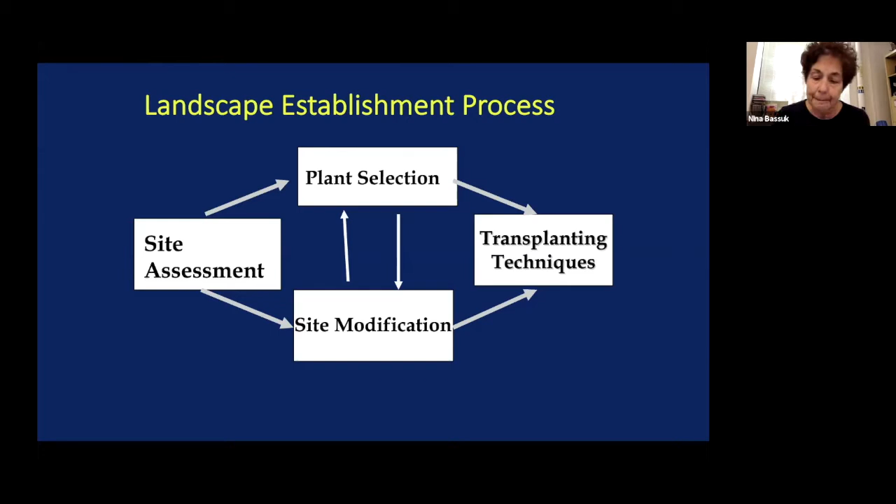And so when all the materials and the trailers were taken out and everything was back to normal, the tremendous soil disturbance that happened on that site does not go away. Even if you put a couple of inches of soil on top and put some grass, the soil disturbance is pretty impressive.

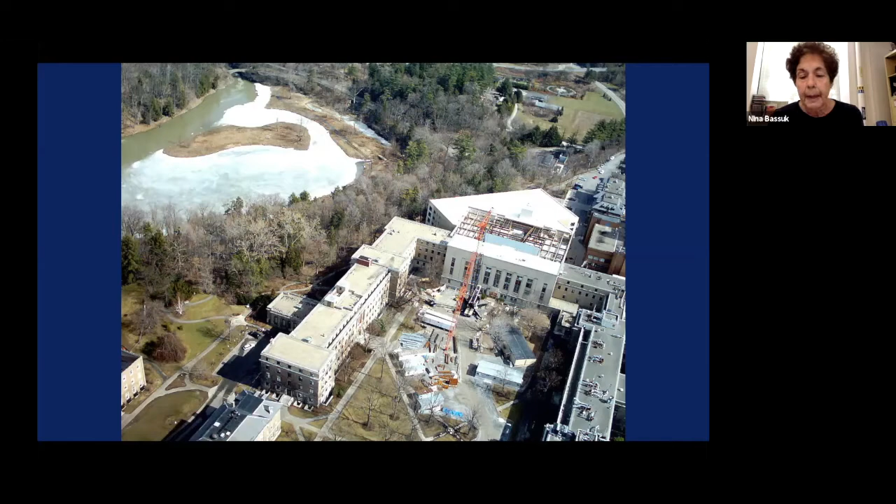So we said, okay, we did that. But we had to do many things to actually bring the soil back to health so that we could actually grow plants on it. It's growing very well now.

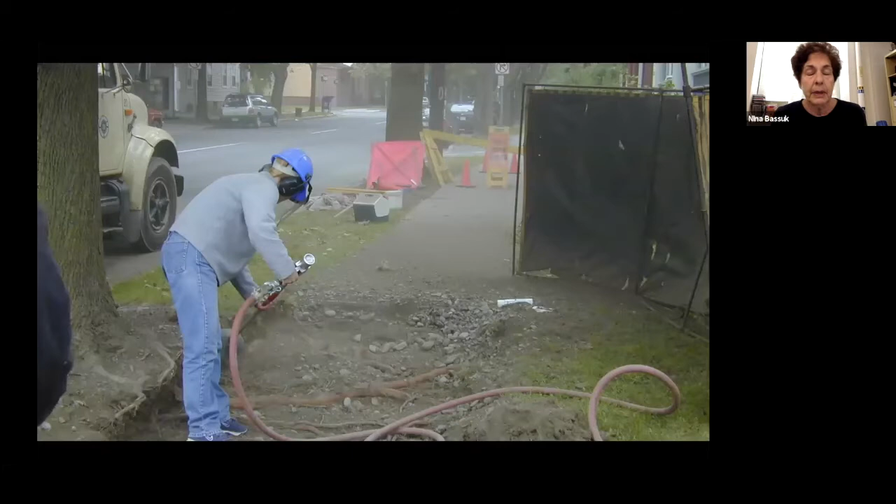Soil is a big issue of site assessment. We try to understand what's happening with the typical soil texture, structure, porosity, bulk density, but also we need to look at where the roots are in the urban environment. And so you can see one of the tools we use is called an air spade or an air excavation tool. And you can see these big Norway maples on the green strip between the curb and the sidewalk.

And there's no way the tree roots of that tree would have enough volume in that 6-foot wide green strip. So we wanted to find out where the roots are, and we do a lot of this work to understand where roots are growing in urban environments. In this case, we took off 4 inches of concrete, and we then tried to find where the roots are, because there's no way that there'd be enough soil volume in what you see on the surface.

So we actually did find that out, took the 4 inches of concrete off and found that the roots had actually found that area of weakness between the curb, between the sidewalk and the base course, and just made their way through that area into somebody's front yard, where they got a lot more of the soil volume that they needed. We see a lot of this very shallow rooting of trees in the urban environment because of the purposeful compaction we find in many cases.

So a lot of what we're going to be thinking about is, how do we find enough volume for trees? And also, how do you find the best trees to deal with this?

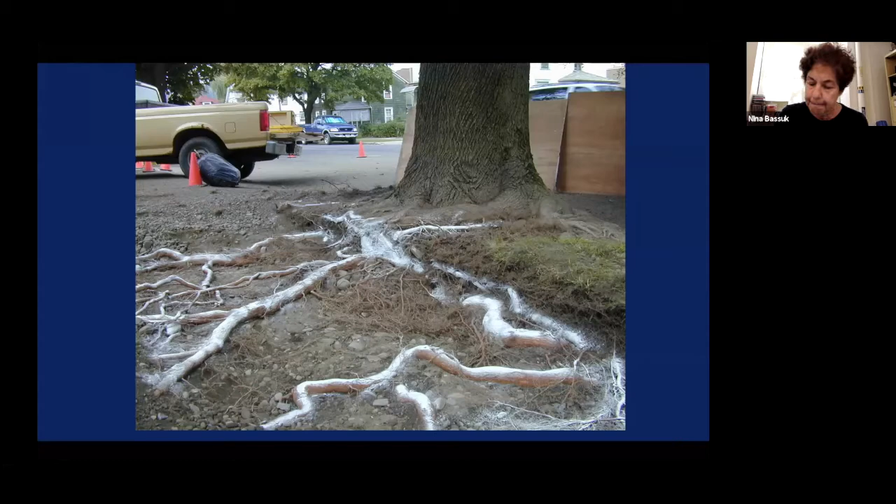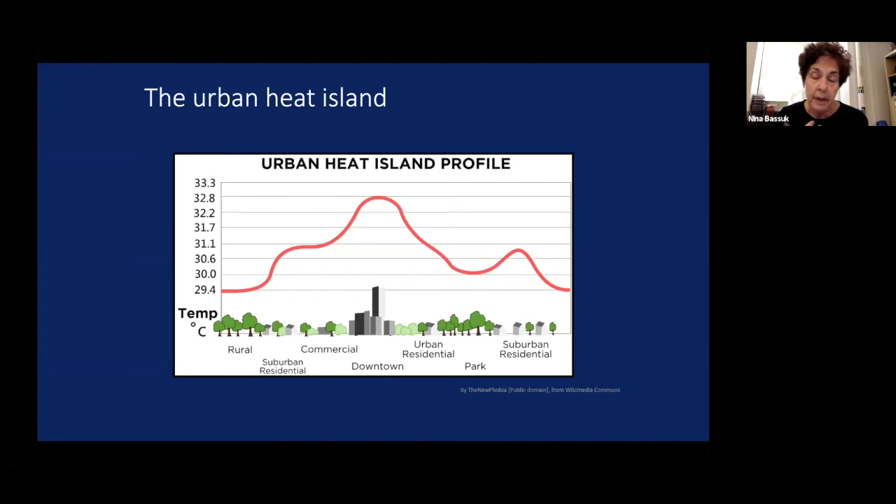Other issues that we deal with in the urban environment are the urban heat island. I don't know if you've seen our speaker last week, we talked about climate change and rising temperatures, but in terms of the urban environment, we've had increased temperatures now for as long as there's been urban conditions, especially pavement and reflective heat and asphalt and cars. And so in the interior of our cities, we get a much raised temperature, which also puts a lot of stress on trees in terms of water loss and water access.

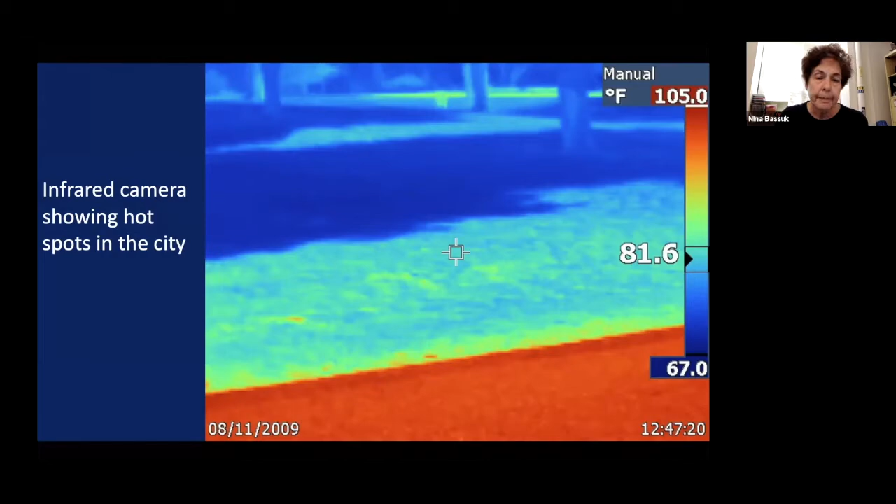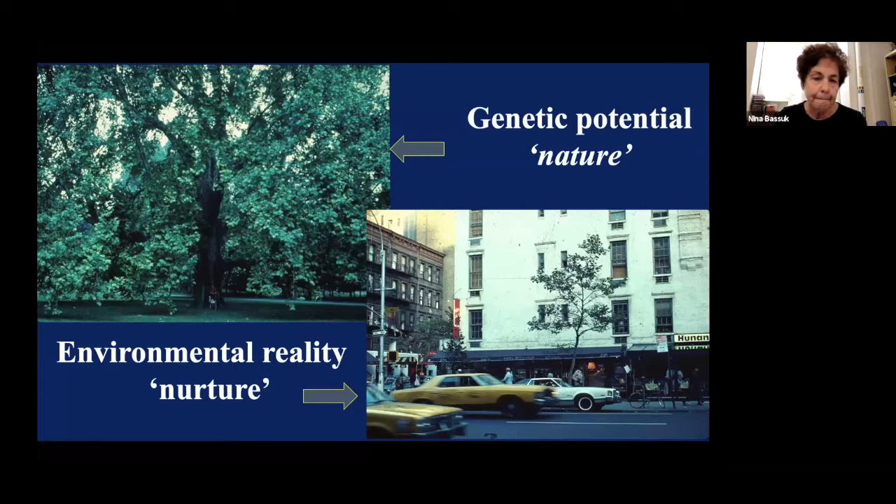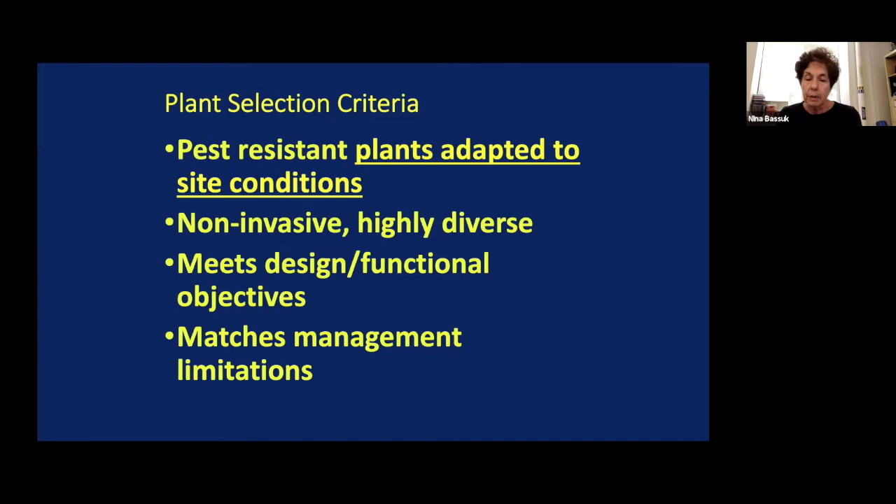So plant site selection criteria: pest-resistant, plants adapted to site conditions, non-invasive, highly diverse, meets the design functional objectives, and matches management limitations. Now, from our point of view, many of those things are procedural and basically planning kinds of things we can do. But when it comes to plants adapted to site conditions, that's what we do most of our work on in terms of the plant selection aspect.

So a lot of what we deal with is drought because of limited soil volumes, because of the hot nature of our urban environment. We have a lot of very high transpiration rates, low water availability, and even in a normal season, we would actually have water stress. So we started to look at plants that deal with water stress or limited water availability.

And there are basically two strategies that trees use. One is to avoid water deficits, and one is to tolerate water deficits. And avoidance may be increased water acquisition, deep rooting, increased hydraulic conductivity. And to reduce water use, you have stomatal closure, leaf abscission, reduced stem and root growth, or stem and leaf growth. So those are avoidance mechanisms, and they're valid, but in terms of the urban environment, we want to have leaves on the trees, and so leaf abscission is not a really good strategy for us.

In terms of tolerance, we're very interested in looking at tolerance, those trees that can tolerate stress by osmotic adjustment and having a very low turgor loss point. So these are things we're starting to look at, and we've done some work on this particular area.

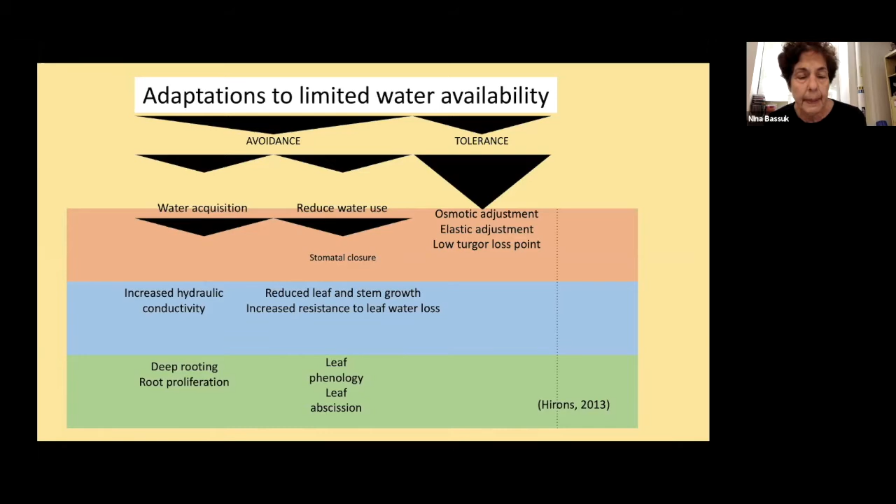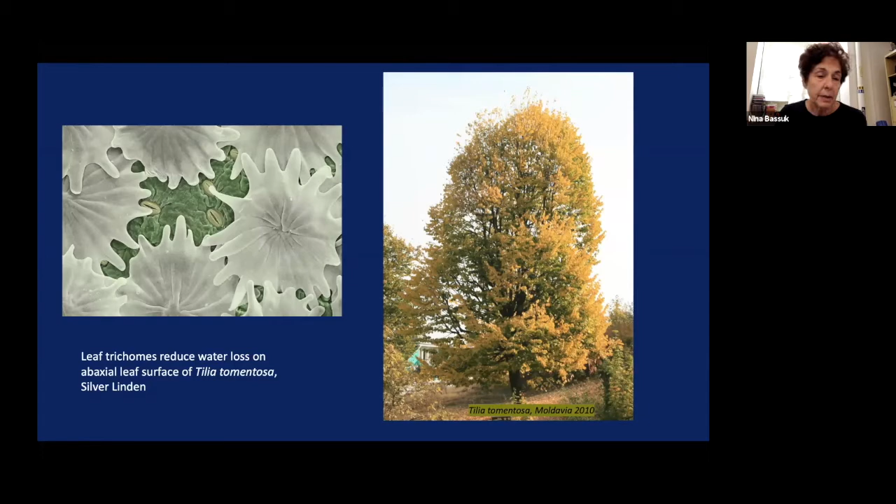So this idea of turgor loss point as a drought tolerance indicator is something we've been working on for many years. And it's kind of a universal measure. We can measure osmotic adjustment and calculate the turgor loss point, where trees actually can tolerate being in the droughty condition until they lose turgor and become damaged. And we can rank species in terms of their physiological drought tolerance this way.

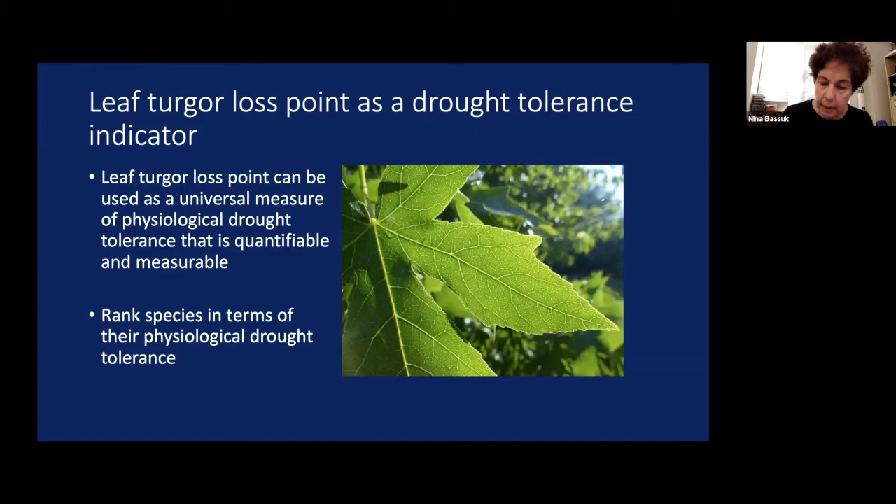So this is some work a couple of my colleagues and I did a few years ago, where we took 27 maple species and cultivars, and we rated them for their turgor loss point. And the more negative you get, the better it is in terms of trees being able to tolerate stress in their cells before they lose turgor. And you can see at the bottom, the dark bars are spring turgor loss point, and the lighter bars are the summer calculations.

And so you have at the top, let's say Acer spicatum, which has very, very high turgor loss point. And Acer spicatum is a tree you'll find in the gorges and the understory, not very drought tolerant at all. And if you go down to the bottom, you see Acer monspessulanum, which is a Mediterranean tree, and Acer grandidentatum, which is one from the arid western part of the US.

And these have quite good abilities to modify their osmotic adjustment and have more negative turgor loss points. So these would be more drought tolerant than the Acer spicatum, Acer mandshuricum on the top. And so we can rate these. It's also interesting to note, if you're looking at the species, different cultivars have different turgor loss points.

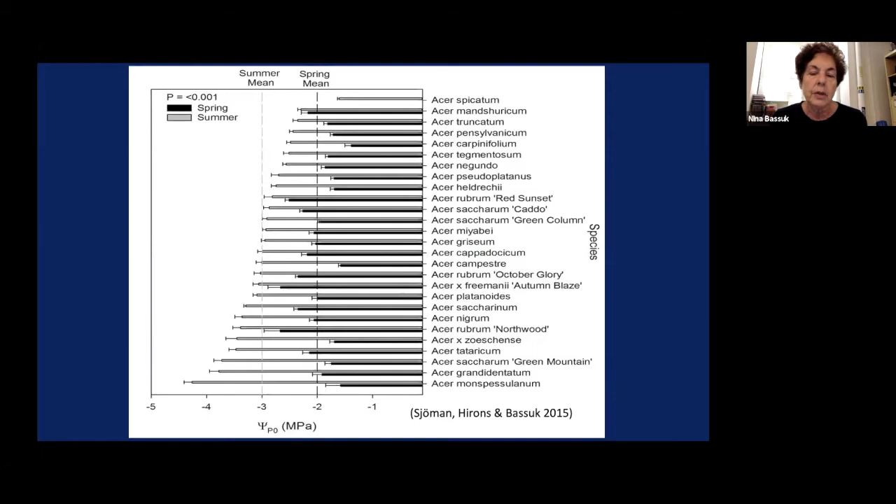So if you look at Acer saccharum toward the bottom, Green Mountain, which has pretty high turgor loss point, and then you go up to Acer saccharum Caddo or Green Column, their turgor loss point is much different. So we have species and cultivar differences that are very useful when we're choosing trees for the urban environment.

So with this information, we started to look at evaluating a long-term project. This is a white oak breeding project, which we started the breeding in 2004, 2006, and we had 7 maternal parents and 36 pollen parents. We had 350 unique hybrids, which we were trying to develop more drought tolerance, more alkaline soil tolerance, as well as good disease resistance and form and so on that you need for the urban environment.

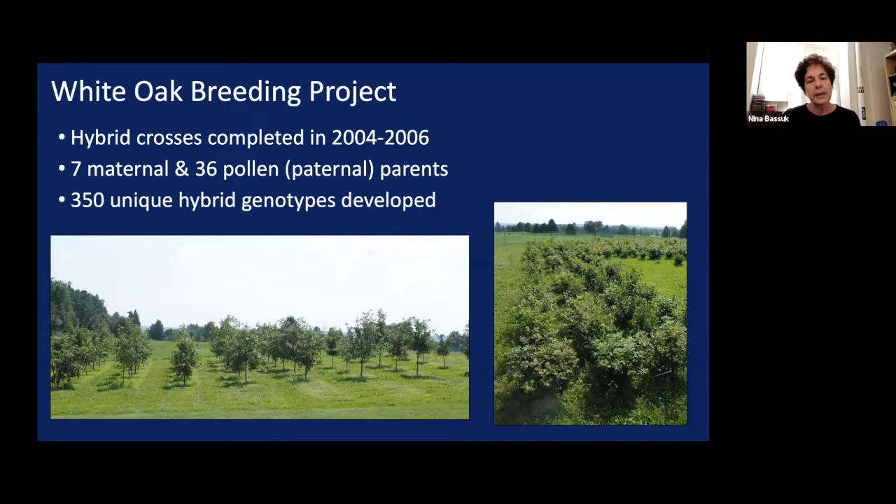We found some really unusual things here. We found true dwarfs. We found trees that had no central leader whatsoever, that grew laterally. And we had all kinds of different interesting things here, but we started to evaluate these for their ability to tolerate drought.

And so this is not those hybrids, but this is showing, I was interested not only in measuring the drought tolerance with the turgor loss point, but also, by giving trees sequential dry downs, could we increase their turgor loss point, basically asking them to step it up, given a little bit of drought. So on these pictures, you'll see on the left is Quercus bicolor, swamp white oak. On the very far left, those trees were well watered. And then the one slightly to the right, those had gone through cyclical drought dry downs.

And on the right side, you see Betula pendula, silver birch, on the far right that had been well watered. And the one toward the left of that had been going through cyclical dry downs. Now the birch is interesting. That's not considered a drought tolerant tree, and you can see why.

Basically, when you give it cyclical dry downs, it just loses its leaves. It says, I've had it, I'm not going to deal with this. I'm basically going to drop my leaves and wait for better times. On the left with Quercus bicolor, it showed no leaf drop. It basically kept on photosynthesizing during this time, even though the one just to the right of the one on the left had gone through many cyclical dry downs.

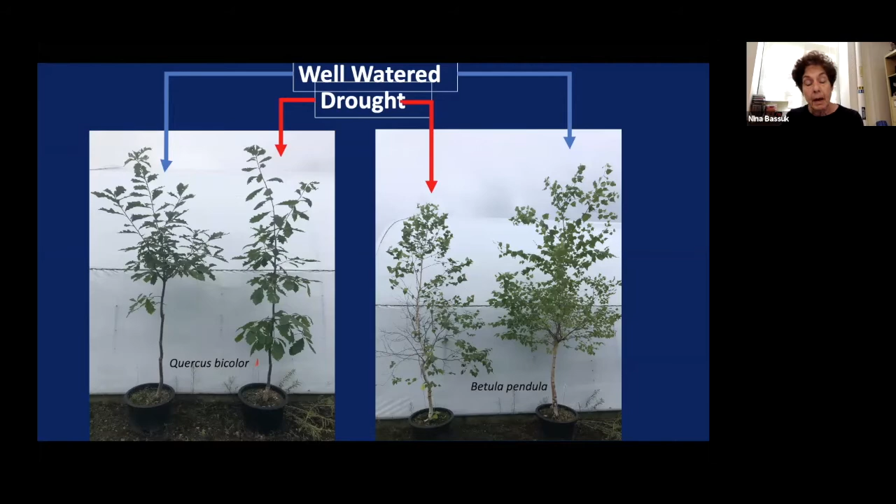So this tree, this white oak, Quercus bicolor swamp white oak, is an exceptionally drought tolerant tree, and it has the added advantage of also being tolerant of wet soils. So this is how we measure it. You can see on the bottom 3 columns, basically the x-axis is turgor loss point, and you have well watered on the y-axis and water deficit.

You can see that the bottom one, which was well watered, the 3 bars, spring, midsummer, and late summer, again, you'd expect in late summer you'd have more osmotic adjustment. But the one that had gone through cyclical dry downs showed that in late summer it had really changed and actually become more drought tolerant because it had experienced those cyclical dry downs and was able to step it up. It had a lower turgor loss point.

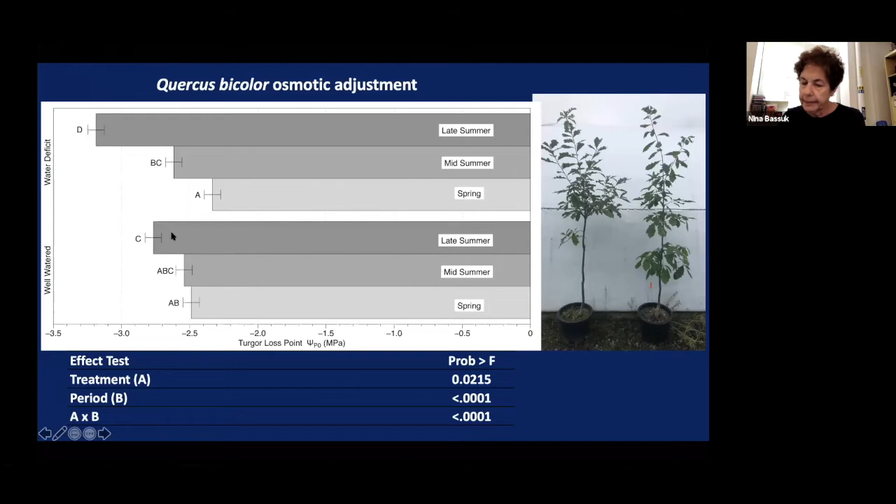So this is kind of interesting to see if we can actually modify the way trees grow so that they are able to tolerate a greater stress. So after we've been looking at these, we were evaluating many of these trees, and also we're looking at the same issues with Brandon Miller's Carya experiment. We were very interested in hickories, and we're doing some of that work with his trees as well.

We then had to figure out, well, how are we going to propagate these trees? Because these are all clones, they're all unique genotypes, and so we spent a lot of years early before we started breeding to figure out how we could clonally propagate them. And this is just a quick view of basically we cut trees down to maybe 4 or 5 inches to get to the juvenile part of the plant.

We cover over the plants so they're etiolated as they grow out. And we treat the bases of the plant with IBA, shade them so they don't crisp up in the sun. And then we take the shade off, and we add soil that's mixed to the cone surrounding those trees, and then we get, hopefully, rooted plants. And so there you can see the whole process. And here we have clonally propagated oaks at the end.

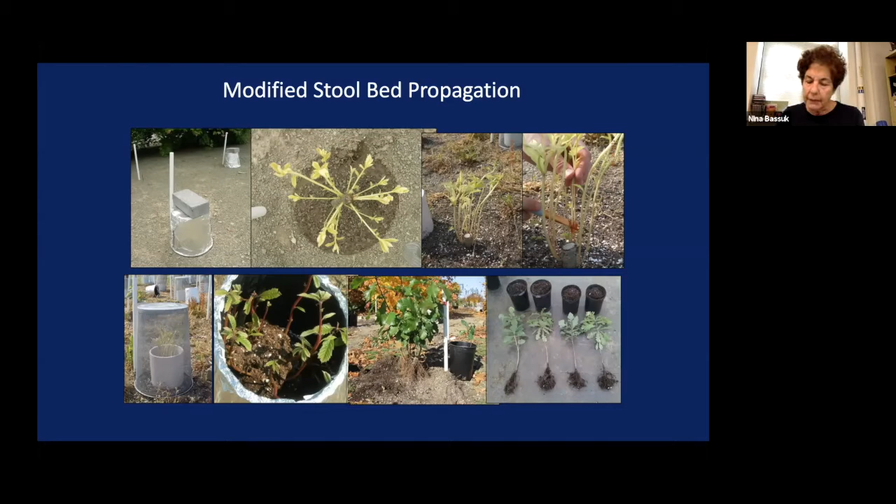And this was great. We're very happy. We published all about this. But in 1 year, we might get 4 plants, which is not very good if we're going to try to introduce this to the nursery. So we went a different route. Tissue culture. Now, if anybody's familiar with micropropagation, oaks have never been really successfully propagated through tissue culture.

And we have been working on this now for many years, and we've had some success. It's all genotype specific. So what works for one doesn't necessarily work for the other, but we have our certain trees. And here's the one tree we hope to introduce first, which is fondly called 1819. This is a three-way cross of different white oaks. And we are starting to get this to multiply and to root in tissue culture. So we have hopes that we'll be introducing some of our hybrids that have particularly good characteristics in the next few years.

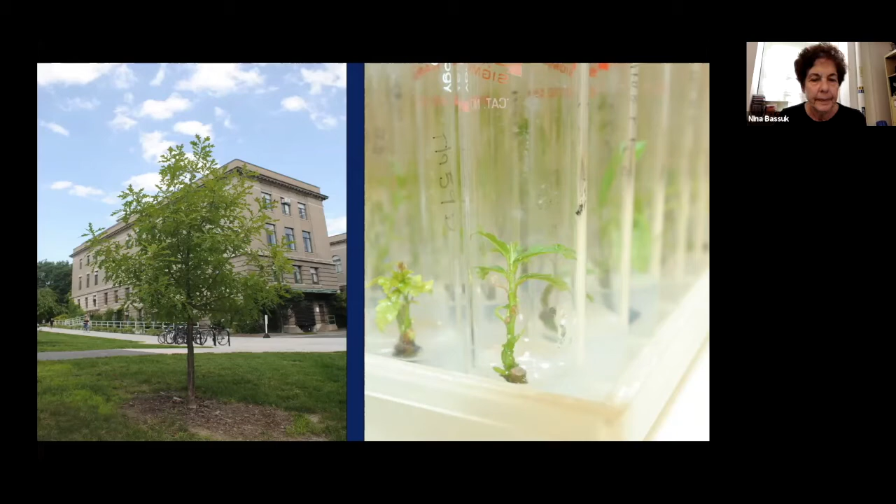So we had our first group of plants. They got so big we had to get them out of the ground. So we gave them to about 100 different communities in New York State, and each community got at least 5 trees, and they are very happy and the trees are growing well.

And we're taking data on this in a long-term study to see how these trees are doing in different soils and different climates. We have trees in Lowville in Zone 3 down to Long Island in the tropics. So we have trees all over New York State of these hybrids that are being tested on a more observational long-term basis.

So I'm going to change gears here just to talk about, we can look at plant selection, which is very important, and we can get better plants, more drought-tolerant plants, and so on. But everything really resides with the soil. You can have the best plant in the world, but with poor soil conditions, they really will not tolerate that condition very well, and they won't grow as well.

So we had to deal with soil and soil disturbance in the urban environment. So this is just going to talk about our work with structural soil over the past 20 years. We developed structural soil because of the required compaction prior to laying pavement. Pavement is ubiquitous in the urban environment, parking lots, sidewalks, roads.

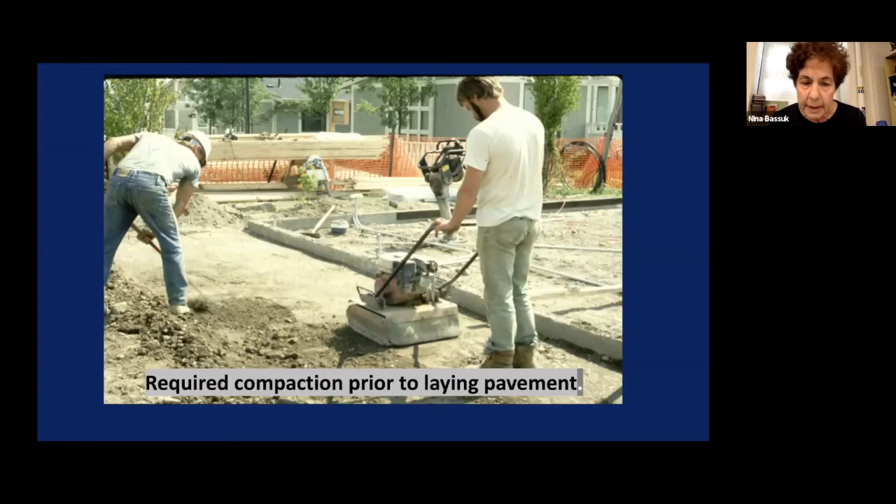And in order to lay any pavement, you have to purposely compact the soil so you have a load-bearing surface to be able to lay the pavement. If it's too soft, the pavement will subside, it will crack. So you need load bearing. And I worked with engineers to figure out what they needed for this. And we learned to speak engineering during this process.

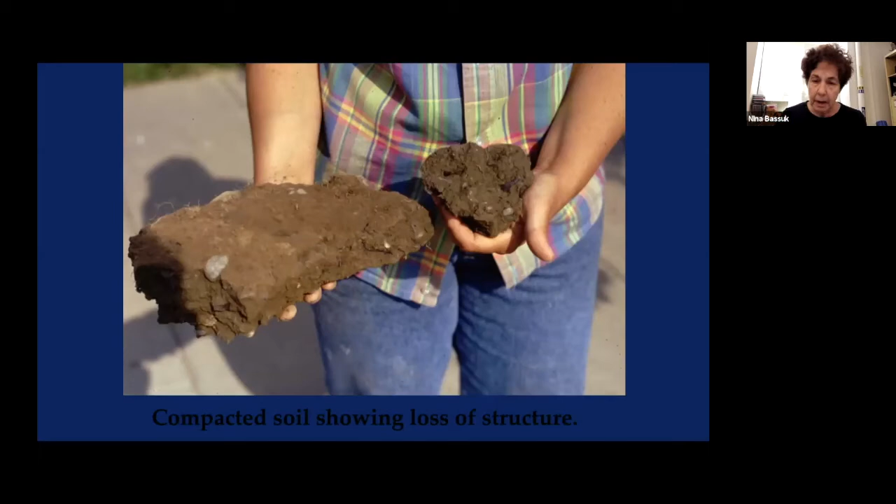And so the soil under that area was not treated any differently than the soil where the pavement is going to go. So yes, you can dig it out and you can put a tree there. And then the problem is, where do the tree roots go? They really have no place to go because of the compaction level of that sidewalk base. And so we often say we lower the tree into the coffin here,

which is unfortunate. Here's a 4x5 tree pit in New York City. Tree is going in, you're going to put some soil around it, and then the tree will grow or not grow. And typically it doesn't grow very well.

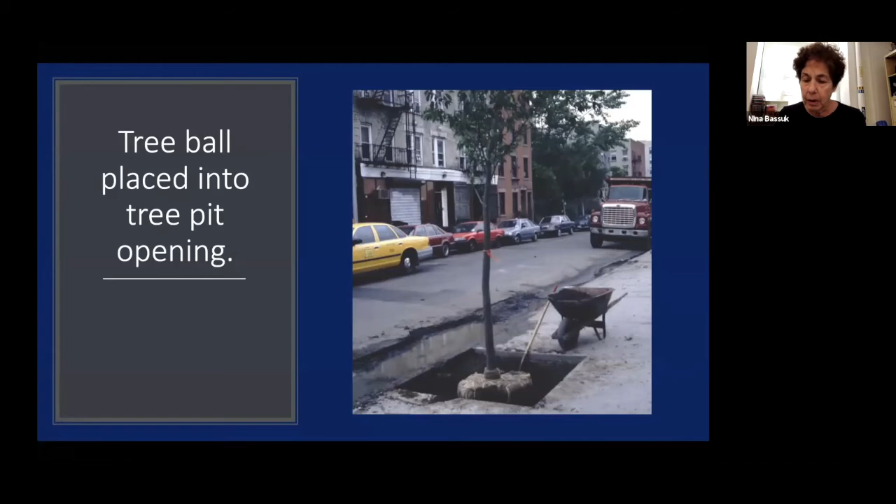And if you get one size gravel and you basically compact it, you'll have very large pores or voids in between. And so in the voids, we would put soil, and if we have stones touching stones, the soil in the pores or the voids is not compacted because the stone is bearing the load from on top. You can think about it as a rigid lattice or a matrix, so that the stone provides this matrix, and then the soil is in the pores, and the soil is not compacted because it does not feel the compactive load on top.

In this part of New York State, we use limestone as our base, typical cheap stone, and this is the size stone we would use for structural soil. And then we would add soil. It's about 80% stone, 20% heavy clay, loam, or at least 20% clay by weight. And this is how it's mixed. There's a couple of other features in that, but this has been used now many places.

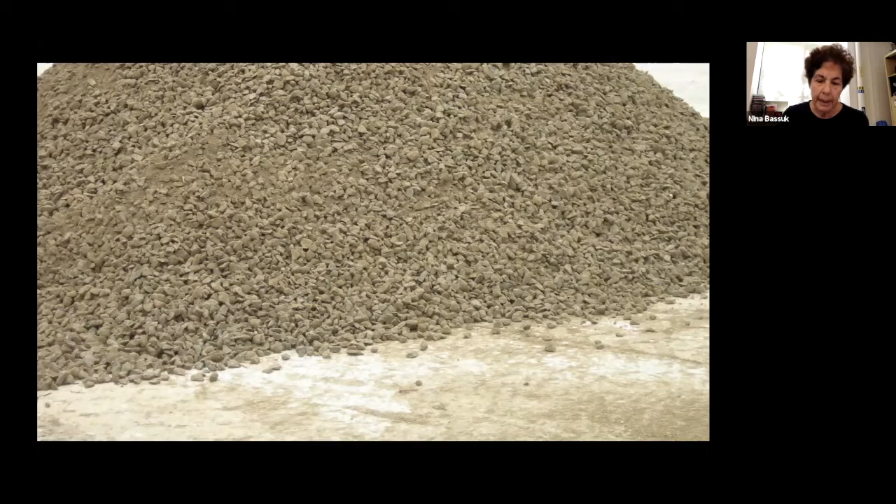When we were basically exploring this, we needed to have some sidewalks to nowhere where we could put this in, because cities don't like you digging up all their sidewalks. So we actually developed these sidewalks to nowhere. We had structural soil and just compacted base with not structural soil, and we had a clonal tree planted on top of them so we could look at what's going on with the roots. And then we take them apart, and that was about 4 or 5 years later.

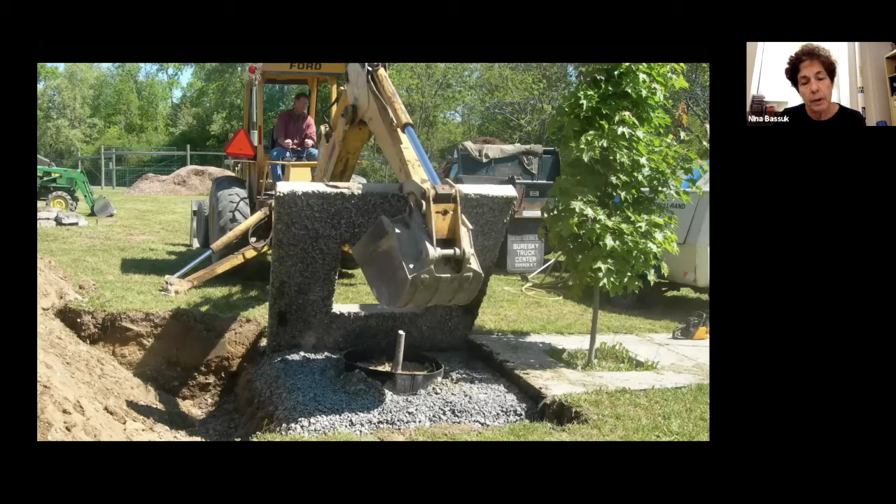We take the sidewalk off. You see a little base course of gravel. Tree was cut down. And then we wanted to look at where the root growth was. So this is using that air spade again, the air excavation tool. And we could take the roots out in one piece by using the air spade. And that's a root system of a tree growing in structural soil, CU structural soil now.

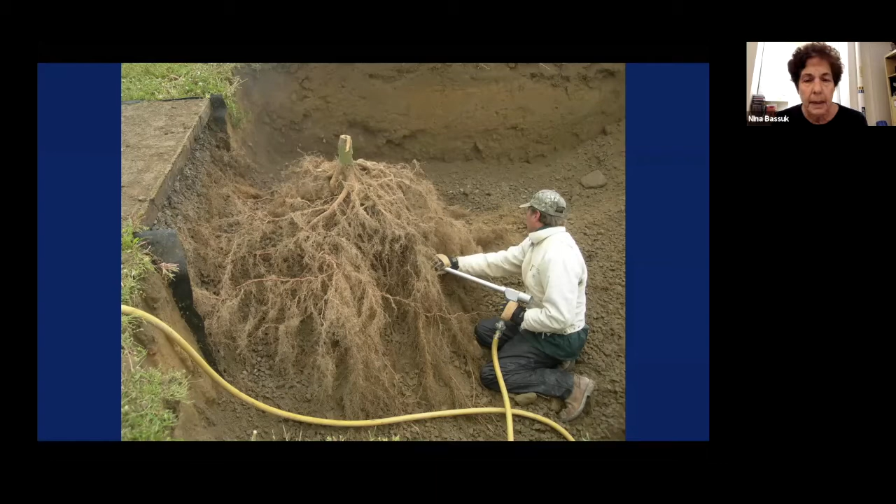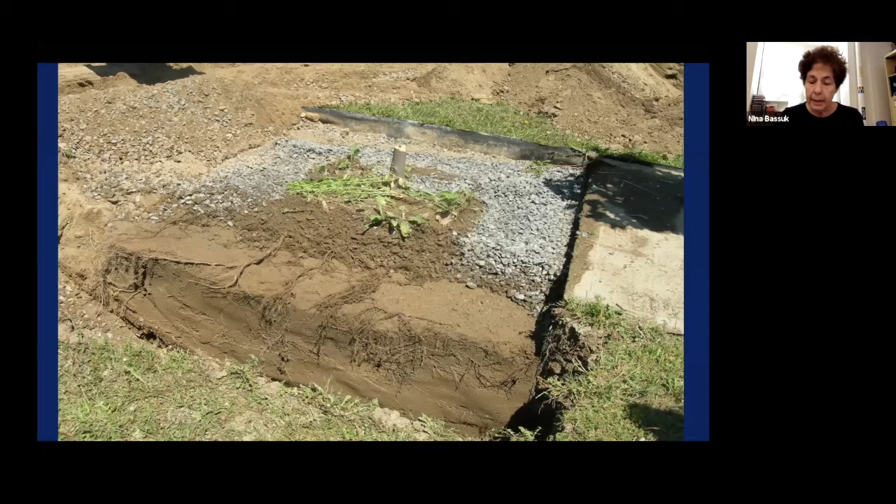And we'd made these trenches down a meter deep, and so we could see just how extensive those roots were. And the control was here, our typical compacted soil with a little bit of base on top. And we excavated that as well. And that's what we found, which we find all over the place, these pancake-like roots with very shallow root systems. That one on the right just found its way down the edge of the trench, otherwise it would not have been so deep. But pancake roots, very shallow, very susceptible to drought, is what we typically find.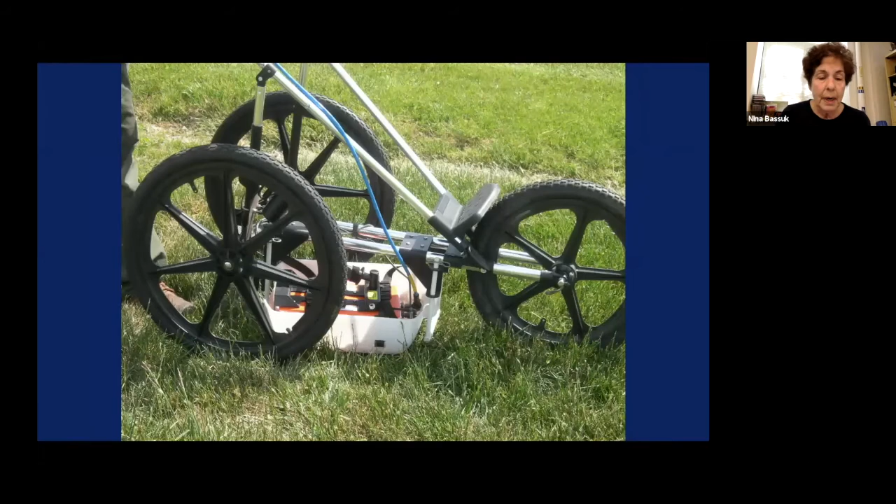So we wanted to study roots under pavement, and this was a difficult thing. You'd have to go through what we did, taking the sidewalk off, air excavation. So is there an easier way to do this? So we started working with Gary Raffel, who's an arborist who owns a ground penetrating radar apparatus, which you're looking at here. It's like a souped up tricycle with a radar unit at the bottom.

And we wanted to look at, well, here basically, there's been some new work with radar looking at how radar could not just look at stones and pot shards and metal, but it could actually locate roots. And we were very interested in this. And so you basically run the machine over the ground, and the radar will reflect a beam from roots. Roots are typically tubes of water. So this is the work that was done, was very interesting to us.

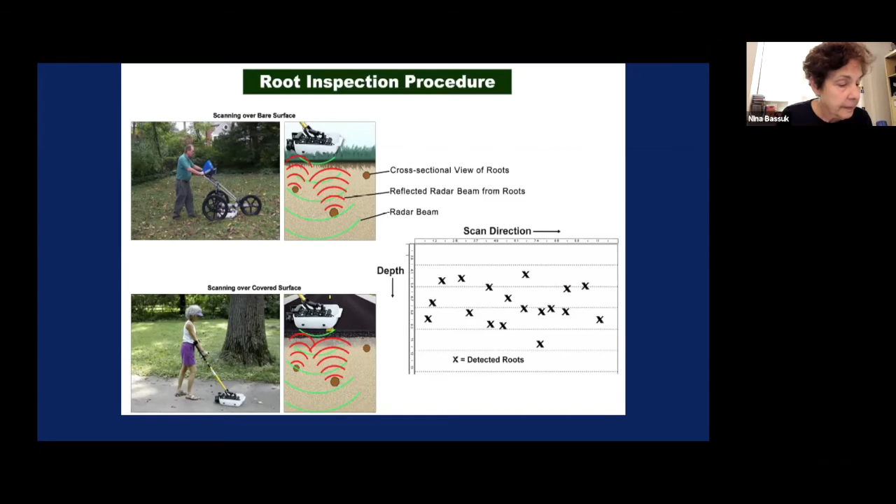So we could do this remotely, not having to dig up everything to see where the roots were. You can do it over pavement, you can do it over soil, and you get a virtual trench. On the right side of the slide, you see if you're walking along and you have depth, every one of those X's is a root detection. So we were very interested, started working with this, but before we got to the point where we could say, yes, this works, we're really locating roots, we had to do a ground truth study to see just where the roots were. Was it really accurate?

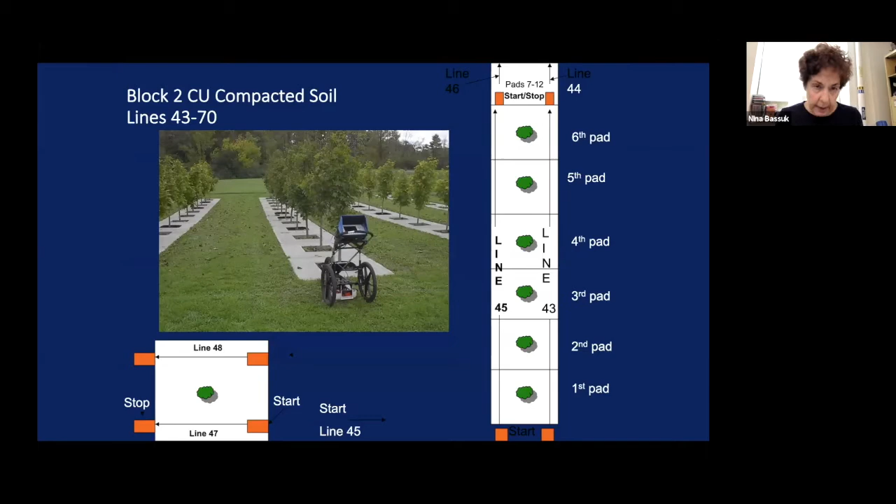So we took our sidewalks to nowhere, and we had our machine, and we did scans down on top of the sidewalk to look where the roots were. And of course, these were trenches. They were lined with heavy mil plastic, so the roots did not go out beyond the sidewalk area. And then we actually dug up some and had our own manual count, visual count of roots that were in that sidewalk area. We could only detect roots just under a centimeter diameter. We couldn't get the fine roots, but we did do those counts.

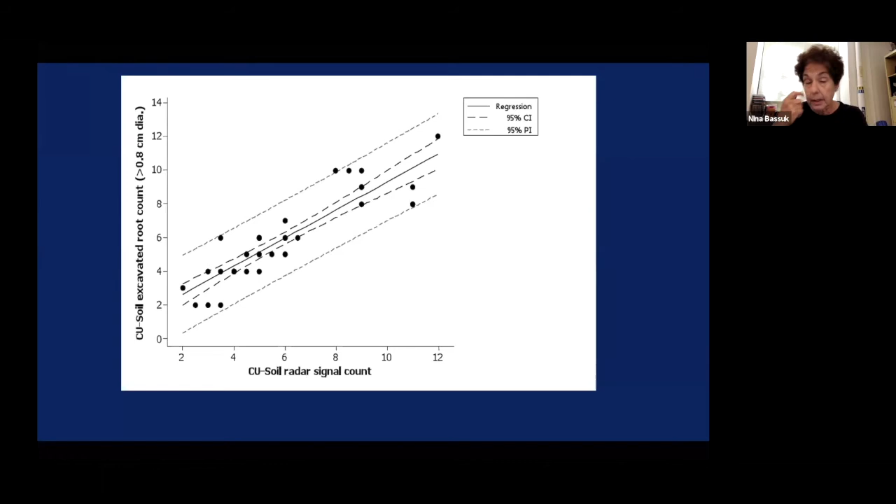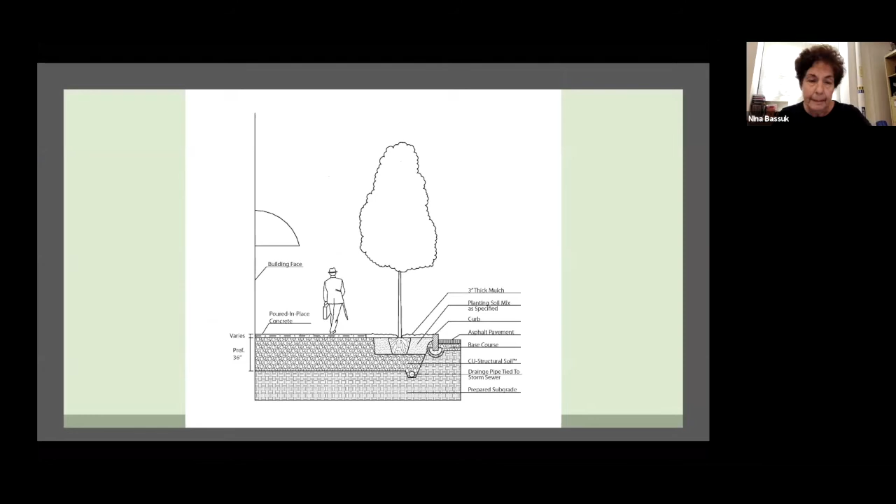So here's structural soil as we would actually specify it under sidewalks. And there's many sidewalks in Ithaca that look like this, where you have structural soil from 24 to 36 inches deep. And then where you have the tree, you have ordinary soil with the opening, but just putting structural soil under the pavement. And this has been done, there's actually 1,500 installations of this all over North America. This is in Brooklyn after 12 years.

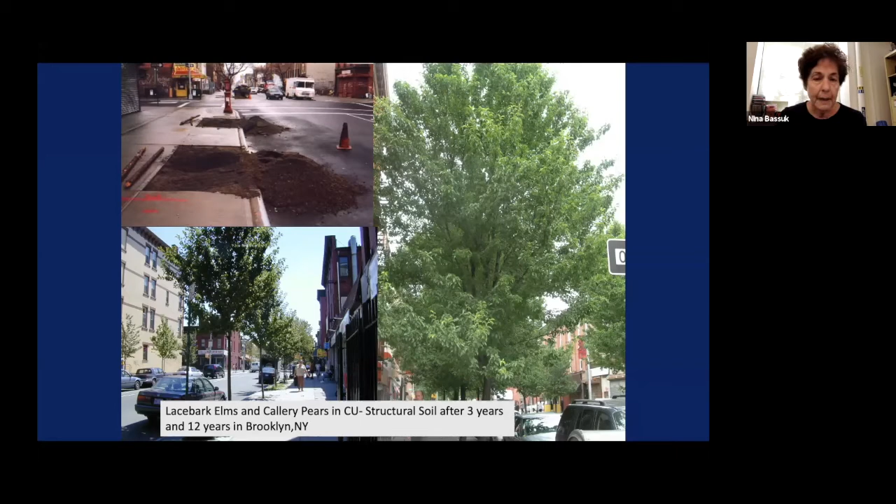Here is the structural soil at the top left going in, not just in those pits, but continuously in a trench. You just see the openings there. And then after 3 years and after 12 years, those trees are doing exceptionally well. Here in Ithaca, on State Street, you have elms planted and growing exceptionally well in structural soil there.

And even in the Olympic site in Sydney, I was talking about this in San Francisco one year, and the developers of the Olympics were there, and they said, oh, let's try it there. So I didn't know anything about this, but they used structural soil for the big plaza where all the athletes would gather. And those are oriental plane trees growing in structural soil.

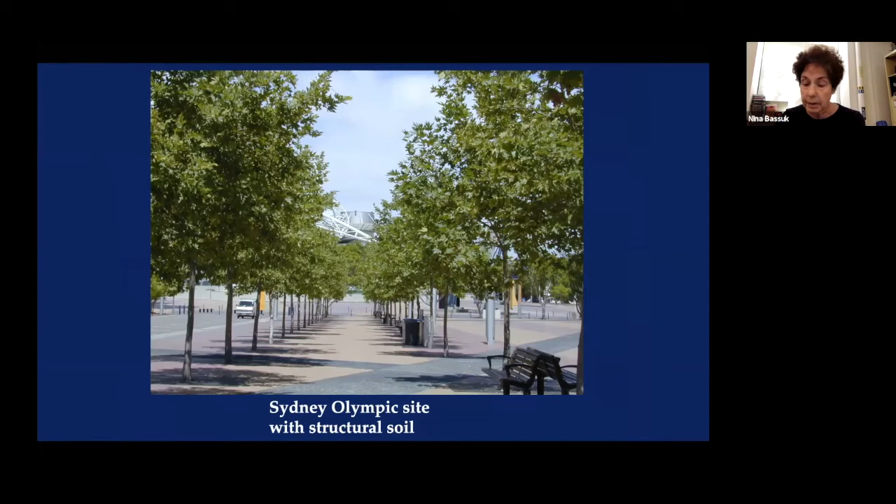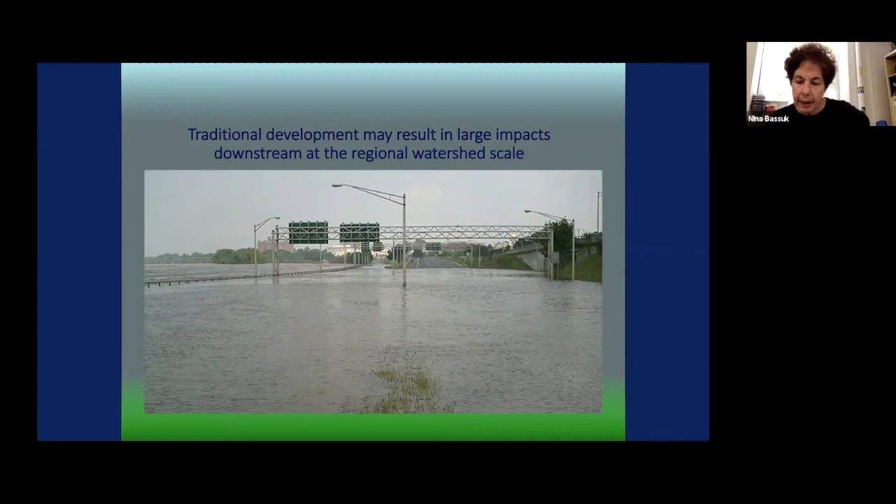More and more pavement gives rise to flooding downstream. We see this was actually Route 81 a few years ago. And we thought we could combine structural soil with porous asphalt to get trees to grow, to basically have water going back in the ground and trees growing in paved sites.

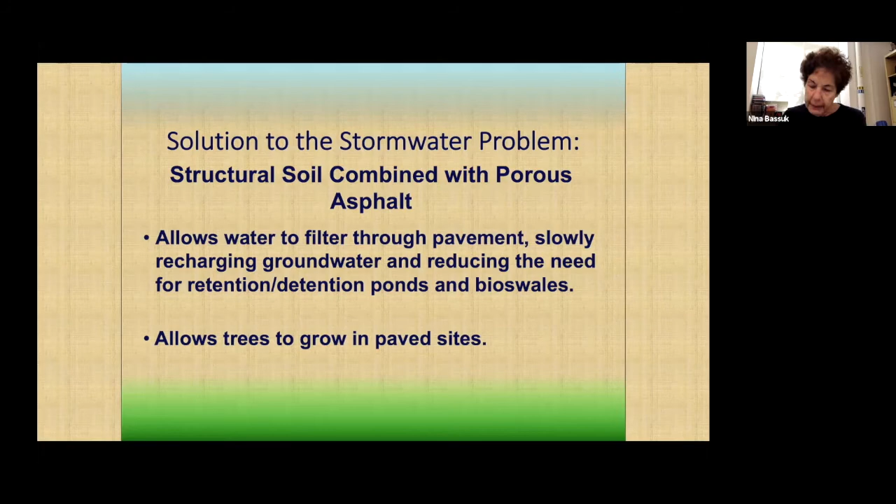We could do this because of the porosity of structural soil. So the total porosity after compaction, this 95 to 100% Proctor is an engineering term for compactive effort, a standard compactive effort. You would need to lay pavement on top of it. So structural soil, you have 26% porosity because you've got such big stones. And soil alone, you've got more porosity, 34%.

But the macropores in structural soil after compaction, about 31% macropores. And in soil alone, you've got about 2% macropores. So the infiltration rate of structural soil is greater than 24 inches an hour, versus less than ½ an inch an hour on normal soil that's just been compacted. So we thought, well, okay, if we have the structural soil, we can put it under porous asphalt, we can get infiltration right through the profile into the groundwater.

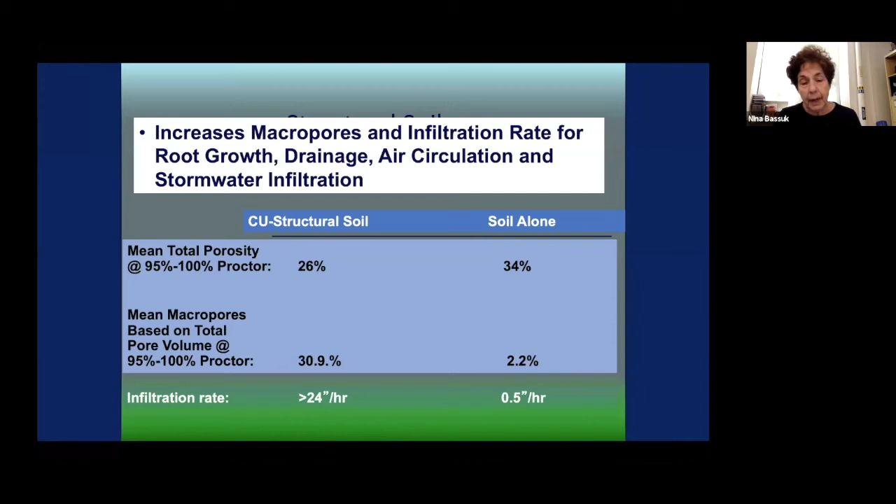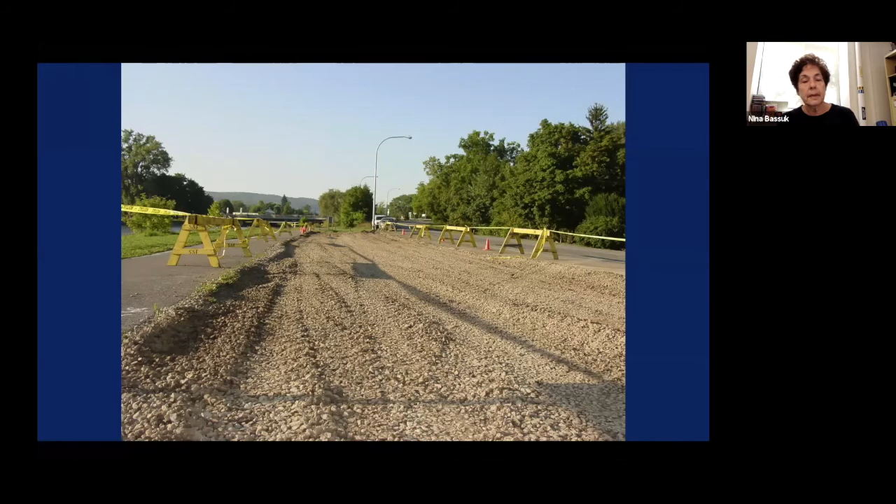So this was a parking lot, a pull-off next to the trail near the inlet that the city wanted to improve. And they allowed us to make this a trial parking lot with structural soil and porous and non-porous asphalt. So we took the entire parking lot and put about 30 inches of structural soil and compacted it. And then we put half of it in porous asphalt and half in traditional non-porous asphalt. You can see the difference in porous and non-porous asphalt.

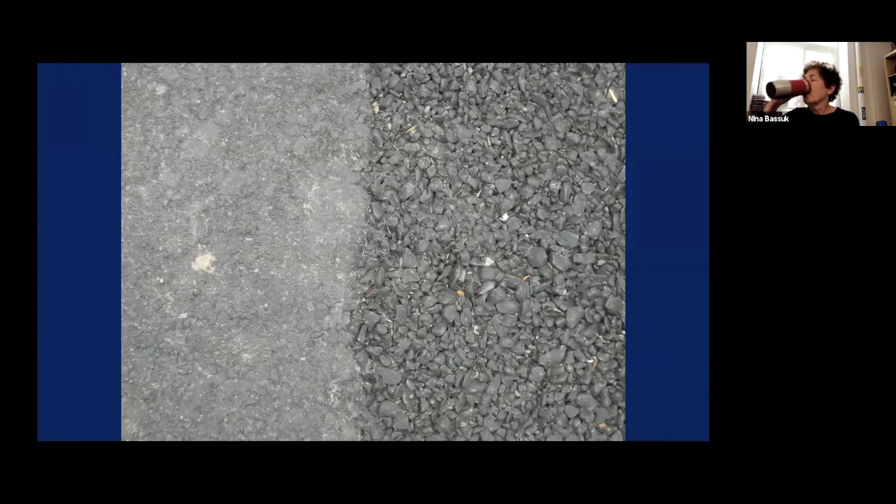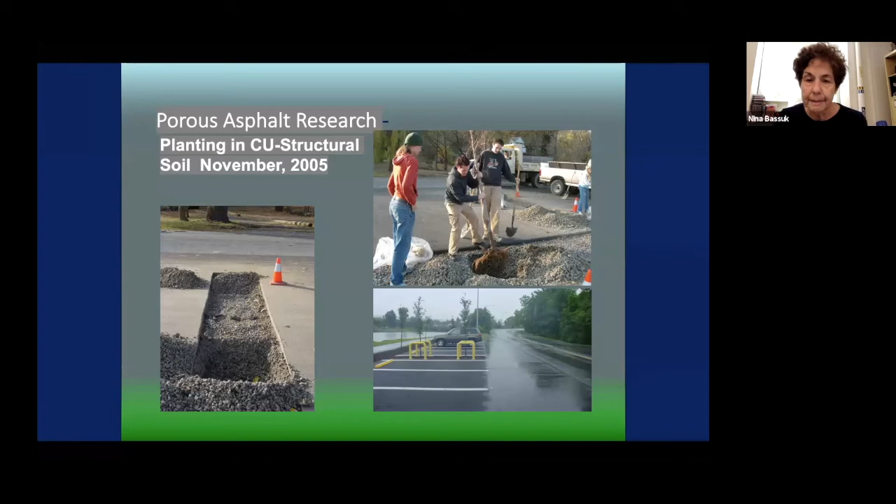So then in November 2005, we sawcut into the porous and non-porous asphalt, and there was structural soil, and we bare root planted elm trees in this parking lot. My students, of course, did it. Here it is the first year, that first spring of 2006. Trees were small, growing. We put them in small. You notice the big yellow barriers because these were 1.5-inch caliper trees, and I could see the snowplows just taking them out. So I put the barriers there.

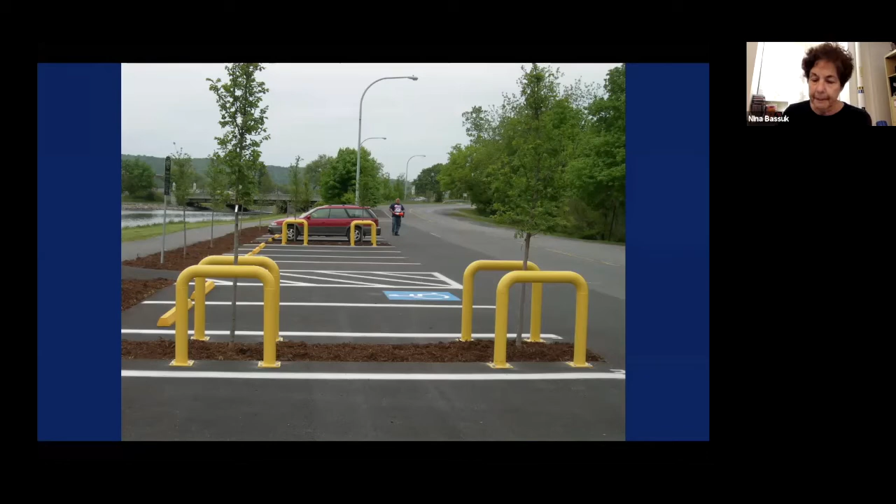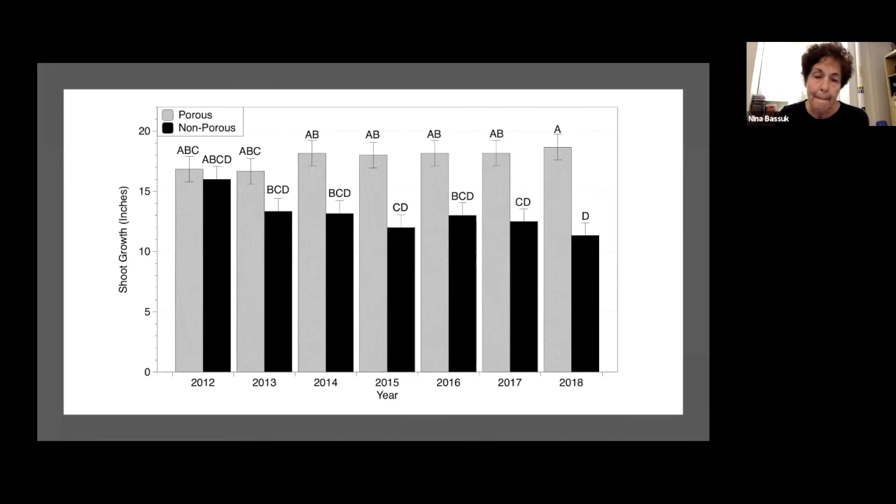So what's going on with the roots? So again, we took our ground penetrating radar and we were looking at what's happening with root growth, feeling confident that because we did our ground truth study, we could actually be optimistic that we were seeing the real roots underground without having to take everything up and destroy it.

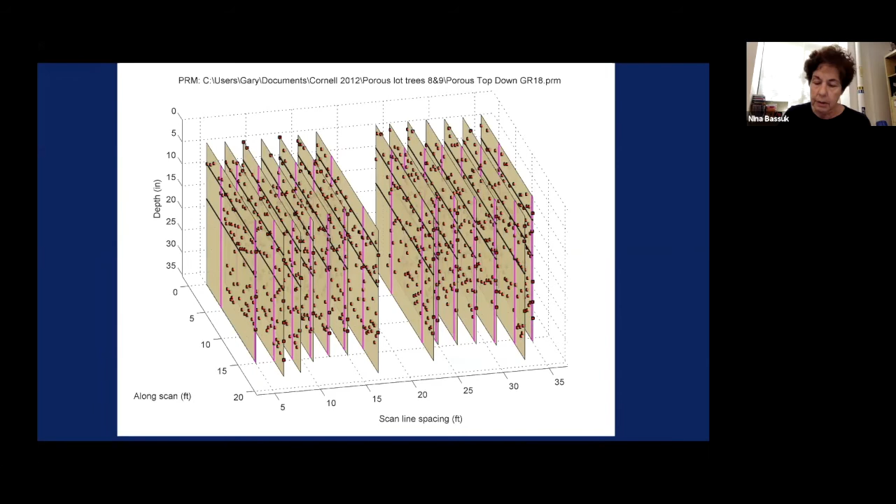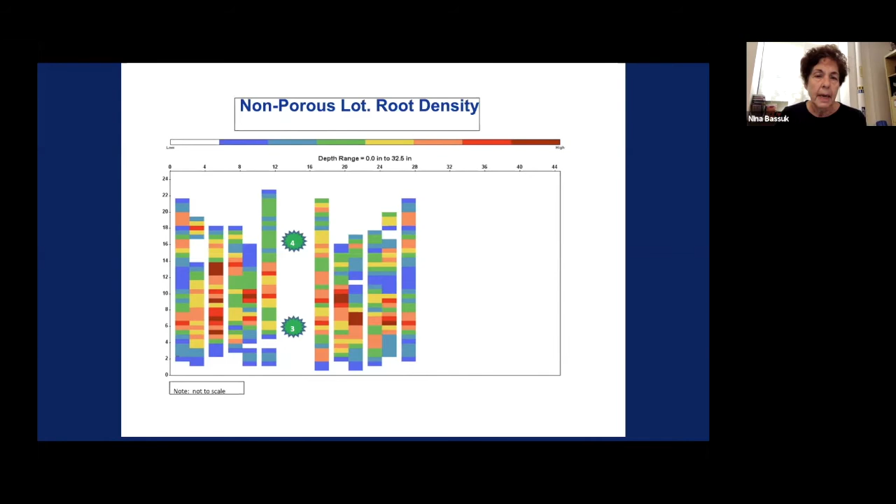Another way of looking at it is if you pancake the roots right to the surface, not looking at depth. This is a color root density chart where bluer colors and green colors are very few roots. Where you get to the orange and brown, you have a lot of roots. So this is the root scan of non-porous traditional asphalt. This is the roots if you pancake them right to the surface. And this is the root density of roots under porous asphalt. So a lot more roots, just as we saw with the scans, a considerable number more roots.

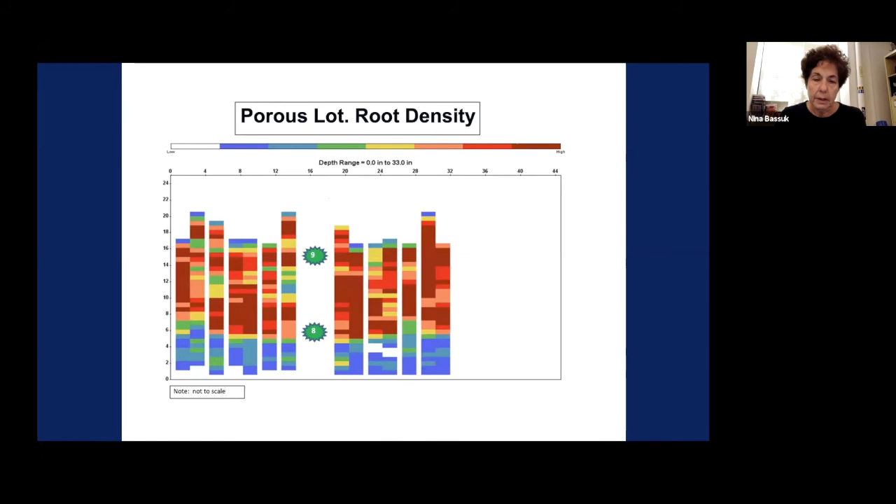So if we look at where the roots were in the porous asphalt, which is the gray bars, you had more at the surface, 8 inches, and basically about the same non-porous to porous asphalt roots in the middle, but where you really have a tremendous difference is the roots go down deep under porous asphalt, and that's where you had the greatest increase of root growth. In total, you see you have quite a bit more root growth in porous versus non-porous asphalt.

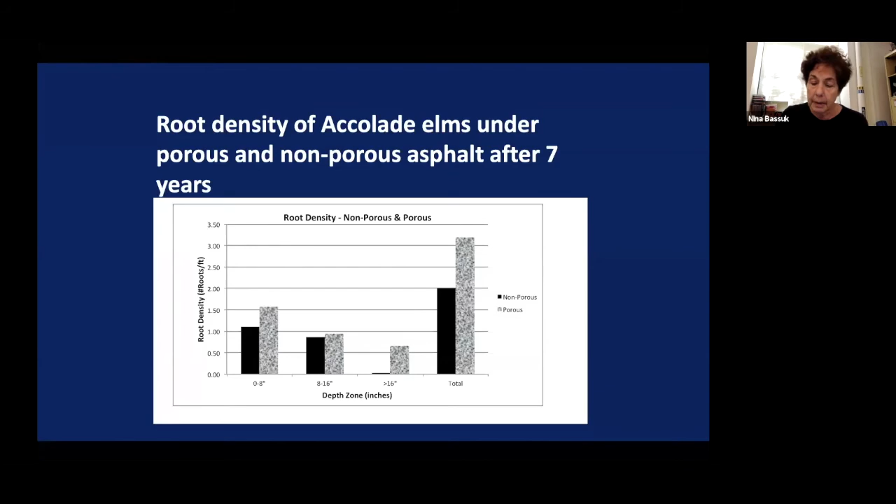Because although we like structural soil, it has good attributes for underpavement, there's a compromise in that the available water holding capacity of this very stony mix is between 8 and 10%, which is low. So we have to choose trees that are more drought tolerant, that are able to mine for water within this structural soil profile. So with that, I will allow some questions if there are any.